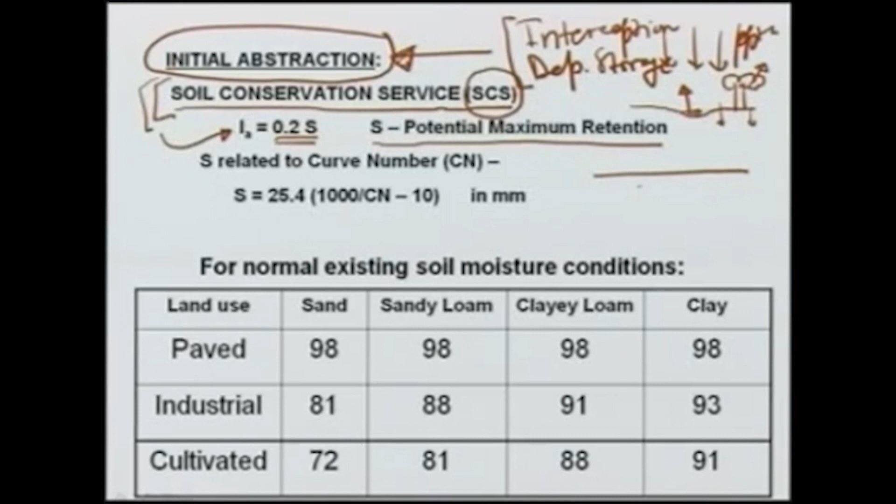Naturally, if we have a surface which is, let's say, paved, then there would be very small retention on the surface. But if we have agricultural land, then there will be a lot of retention possible. Therefore, S will depend on the land use and also what kind of soil it is.

The SCS has related S with an empirical constant called the curve number, or Cn, and typically this Cn is popularly known as the SCS curve number. The curve number depends on the type of soil and the land use of that area. It also depends on the existing moisture condition. For example, if the soil is already moist, then less infiltration will occur. If the soil is initially dry, then more infiltration will occur. So, initial abstraction will be high if the soil is dry initially. So this relation between the curve number...

and the value of S, the potential maximum retention, is given by 25.4 times 1000 over Cn minus 10. This factor converts inches, because originally the formula was in inches, so to convert this into millimeters, we use this 25.4 factor. As you can see, Cn can be a maximum of 100, because when Cn is 100, then S will be 0. 100 means there is no storage, so everything which falls on the surface will go as runoff, there will be no infiltration or evaporation.

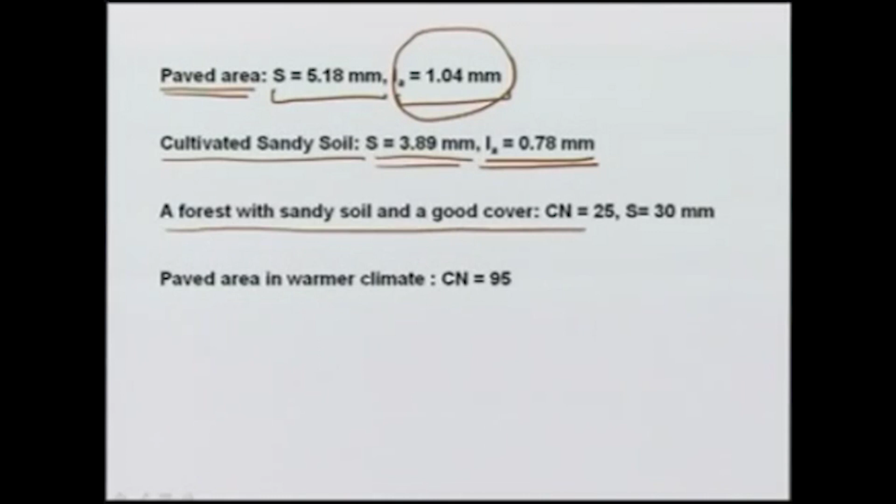Curve number can be as small as 25. For example, if we have a forest area and soil is sandy with good cover, meaning the foliage density is very high, sandy soil will cause more infiltration.

Curve number of 25 will give us initial abstraction, which will be 20% of this, so 6 millimeter, which is quite high, meaning the initial rainfall of 6 millimeter would be completely absorbed by the catchment and there will be no runoff. So, for forest area with permeable, sandy soil with a very good cover, the initial abstraction is quite high.

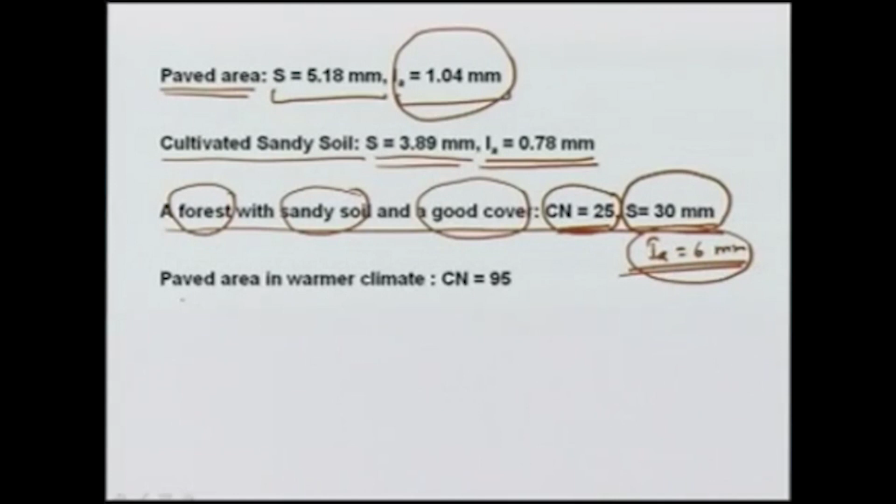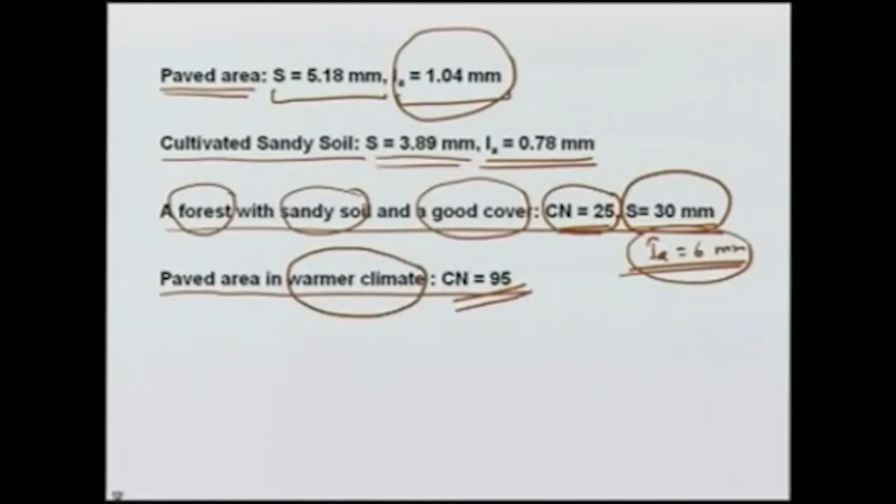It also depends on the climate. For example, if we have a warmer climate, we can reduce the curve number. For a paved area, we have already seen that the curve number is 98 for all types of soils, but if the climate is warmer, we would expect a little more evaporation, and we can reduce the curve number to 95.

So, this method gives us an idea of how to find out initial abstraction from the precipitation. It is an empirical method. Tables of curve numbers are available for different types of land uses, different types of soils, and different existing moisture conditions, what is known as the antecedent moisture conditions.

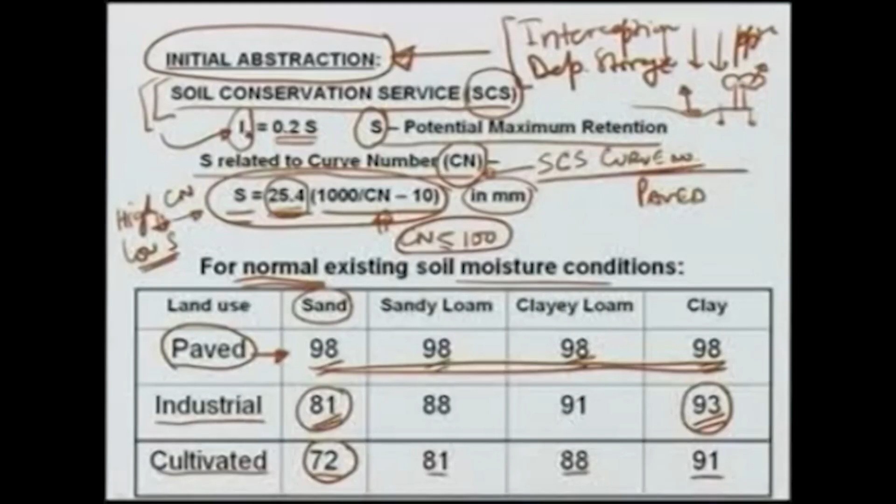Under normal conditions, we have shown the table. This is under normal conditions. If dry or wet, there are other tables or equations which relate the curve number with the land use and type of soil, but we will not go into details of that.

The other part which we have after initial abstraction, then we have other abstractions like evaporation, infiltration, and transpiration. Typically, the evaporation from a water surface can be described as changing with time of the year. For example, in summer months we would expect very high evaporation. For winter it would be lower.

Sometimes evaporation may be as high as 200 or even higher than that. In most of the dry areas in India, it would be higher than 200 to 220 millimeters per month or so. So the question is how to find out this evaporation, which varies over a wide range.

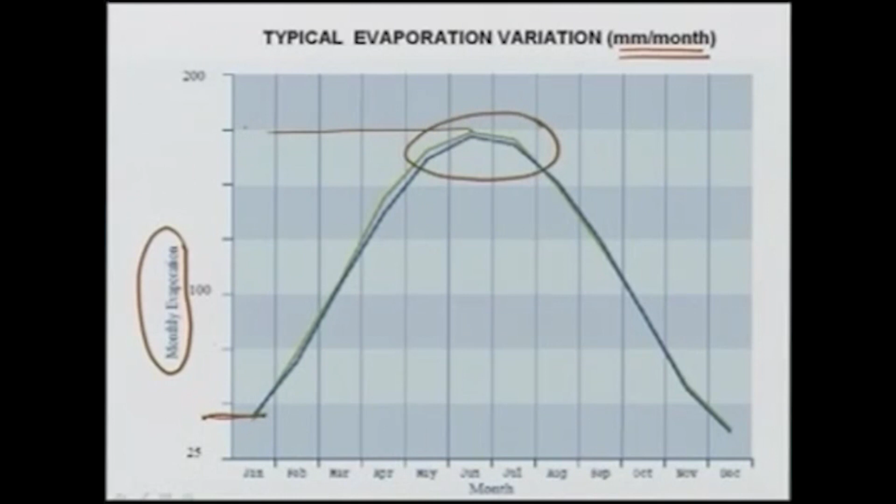If you look at this value, it is close to about 40, 50, and if you look at this value, it is close to 170, 175. So, evaporation will vary a lot from month to month, and for a typical month or for a typical year, if we want to find out evaporation, there are empirical equations which are given.

We have already seen that we can measure the evaporation by using an evaporation pan and then using a pan coefficient. So that measurement can be done, but there are some empirical equations which can be used if data is not available from evaporation pans.

Some of the empirical equations which we have seen, for example, for evaporation, we have the Meyer's equation and the Rohwer's equation. Rohwer's equation and Meyer's equation are both based on the fact that evaporation will be directly proportional to the vapor pressure deficit. So EW, as we have seen, is the saturation vapor pressure, and EA is the actual vapor pressure.

EW minus EA denotes the deficit from the saturation value to the actual value, and this will govern the amount of evaporation from a water surface. We have also seen that not only the deficit...

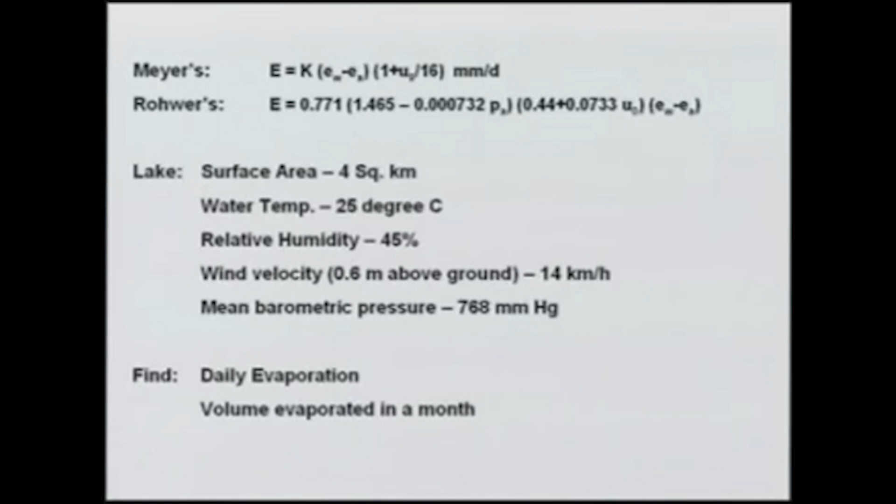This water temperature means we have to find out EW at 25 degrees. We can use the graph or some equations to find out the EW corresponding to this temperature, and as we can see, it is obtained as 23.77 millimeter of mercury, which we can get from the figure or the table. So for a temperature of 25 degrees Celsius, vapor pressure of 23.77 is obtained.

The actual vapor pressure will be obtained by multiplying this saturation vapor pressure with the relative humidity, and the data given for this problem is a relative humidity of 45%. So this indicates that the actual vapor pressure would be 45% of the saturation vapor pressure, which is obtained as 10.70 millimeter of mercury.

In the Meyer's equation, there is an empirical constant K, which depends on the kind of water body we are dealing with. If we have a large and deep body, then K is taken as 0.36. Since this is a large body, 4 kilometer square area, we can take K as 0.36.

So knowing K, EW and EA, we are now left with obtaining the value of U9, which is the velocity at 9 meters above the ground level.

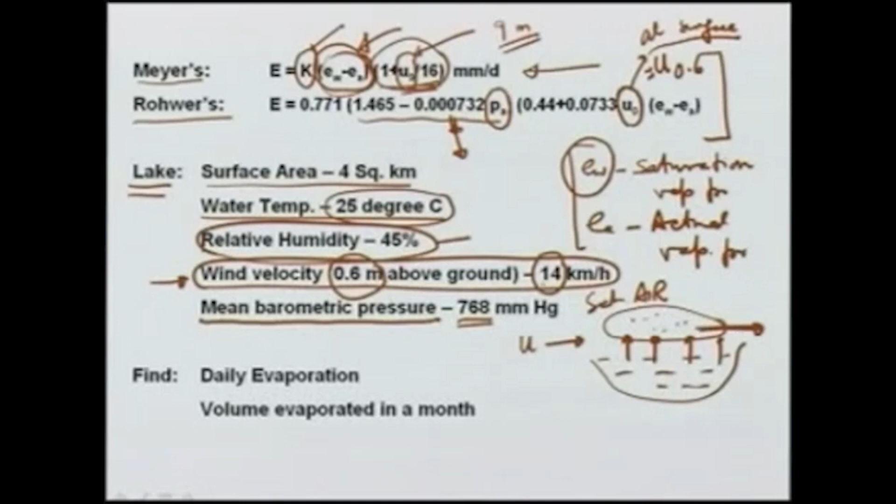So using the Rohwer's equation, we have this constant 0.771, barometric pressure term, wind velocity term, and saturation deficit term, and this u0 we will be using as u0.6. So using this data, we get a value of 13.33 millimeters per day. You can see that here we have 10.77 millimeters per day, and here we have obtained a value which is 13.33 millimeters per day. So they are a little different, not exactly the same thing.

The other thing which we do, this is only evaporation. Now, most of the times we would be interested in combining evaporation and transpiration. So we need to know what is the evaporation from a water body as well as what is transpiration from plants or vegetation in that area, and as we have already discussed, we combine these two and call that evapotranspiration.

Evapotranspiration will depend on a lot of factors. For example, what is the solar radiation available at that point, what is the number of daylight hours, because if we have cloud cover, then naturally evapotranspiration will be smaller. So we need a lot of information. There are again empirical methods which use some equations, and there are some theoretical methods which are a little more based on theory rather than only empirical coefficients. So we would look at some of these techniques and see how to compute evapotranspiration based on some of the empirical and theoretical approaches.

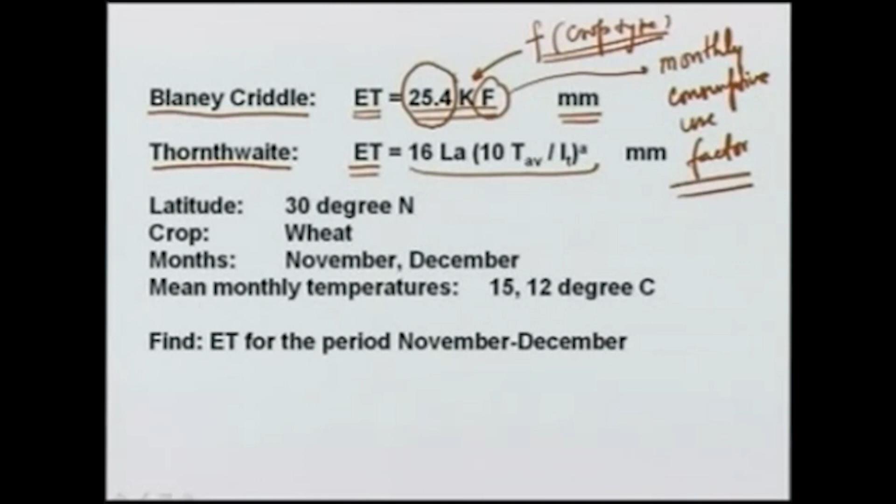And there is another method which is commonly used, is the Thornthwaite equation, which again tells that Et is equal to 16. La is a factor which depends on the latitude and the month. T average is the average temperature, and using these two equations we can find out the evapotranspiration at a particular latitude for a given month where average temperature will be known.

So let us take this data. We have location where the latitude is 30 degrees north, crop is given as wheat, and for wheat we know that the value of k in the Blaney-Criddle equation is taken as 0.65. For rice it is 1.1. Now let us look at 2 months, months of November and December, for which the mean monthly temperatures are 15 for November and 12 for December.

And what we need to find out is evapotranspiration for this period of 2 months, November and December.

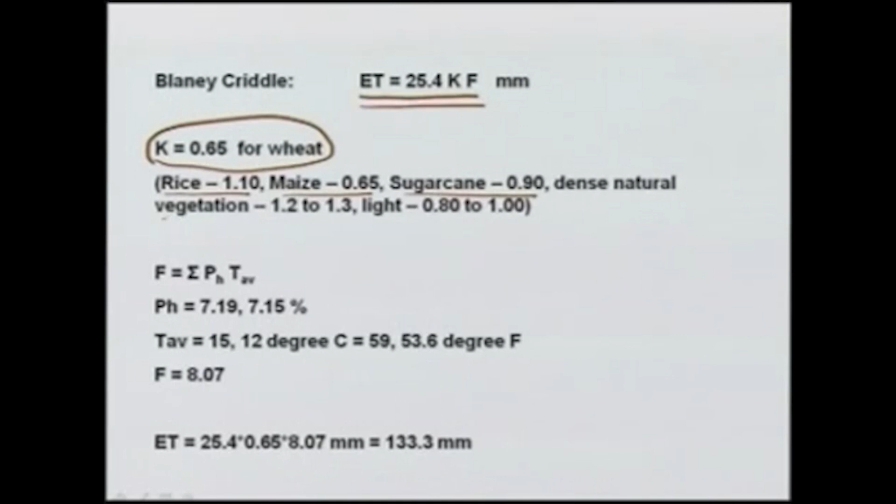In the Blaney-Criddle equation, written as evapotranspiration equals 25.4 kf, we have already discussed that for wheat, k is given as 0.65. There is a table of values of k for different types of crops. For example, rice is 1.1, maize 0.65, sugarcane 0.9. Natural vegetation, if dense, can be taken as 1.2 to 1.3, and if light, 0.8 to 1. Since wheat is given here, we will take k equal to 0.65.

The factor f is the summation of pH. pH is the monthly percent of annual daylight hours, and this will depend on latitude and of course the time of year, which we say as month.

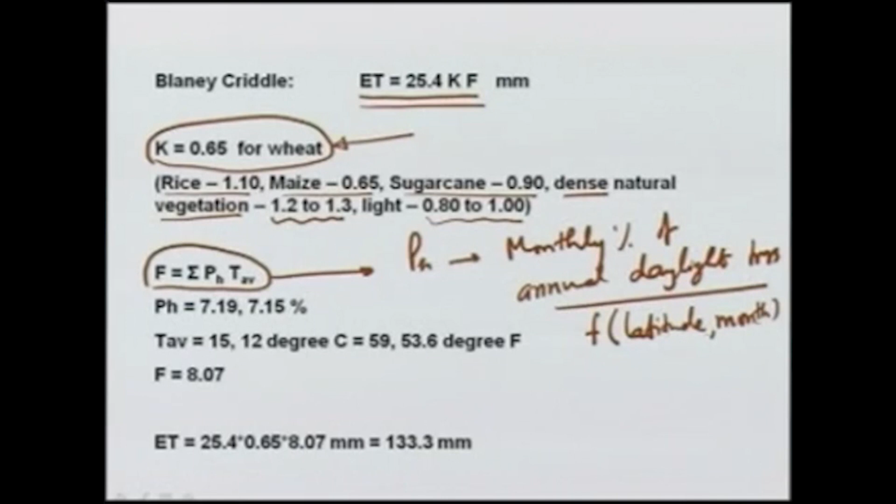T average is given for November and December as 15 and 12 degrees. In the Blaney-Criddle equation, which was based on the FPS system of units, temperature was in degrees Fahrenheit. So we can convert this 15 and 12 degrees Celsius to 59 and 53.6 degrees Fahrenheit.

The pH value is obtained from a table of values which relate the monthly sunshine hour percent with the latitude and the time of the year.

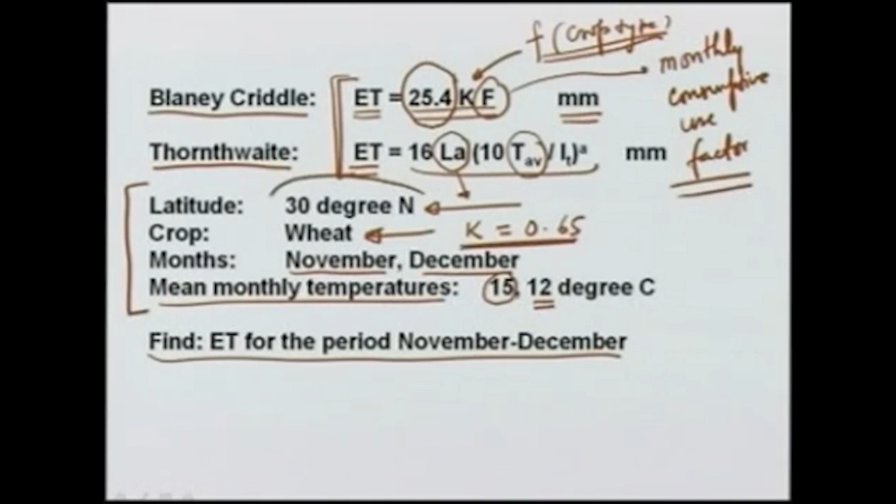For example, the latitude given, if we look at the data for 30 degrees north latitude, for November and December we can look at the percentage values: 7.19% for November and 7.15% for December.

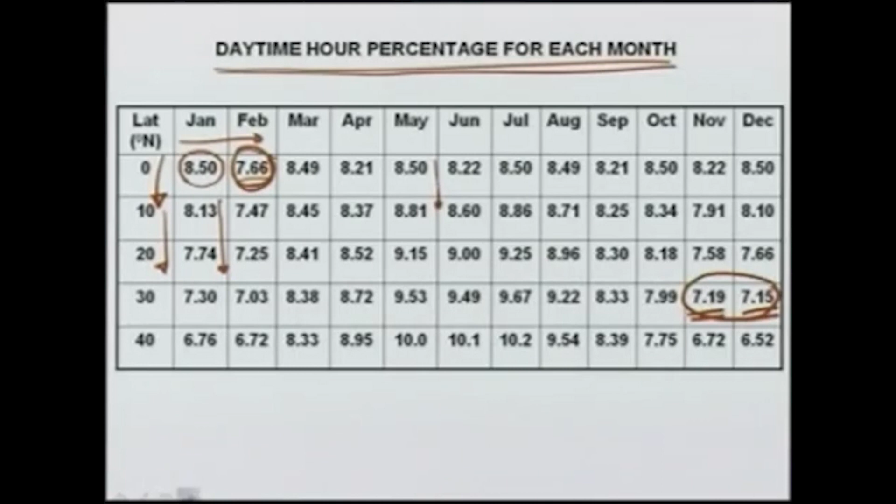So using these two values of percentage and using the mean temperature, we can estimate the value of F, which is the summation of pH monthly percent. We have already seen this as 7.19 and 7.15%. T average is 59 for November, 53.6 for December. So the summation of these two, sigma pH T average for these 2 months, comes out to be 8.07.

So knowing F and K, we can find out the evapotranspiration. 25.4 converts from inch to millimeter, K for wheat, and F for November and December months for 30 degrees north latitude. It gives us 133.3 millimeters of evapotranspiration over the 2 months of November and December.

Similarly, if we use the Thornthwaite equation, we can write Et equal to 16 L A, 10 T average over It, and exponent A. The exponent A, as you can see, is given by another equation which relates it with It. It is the heat index.

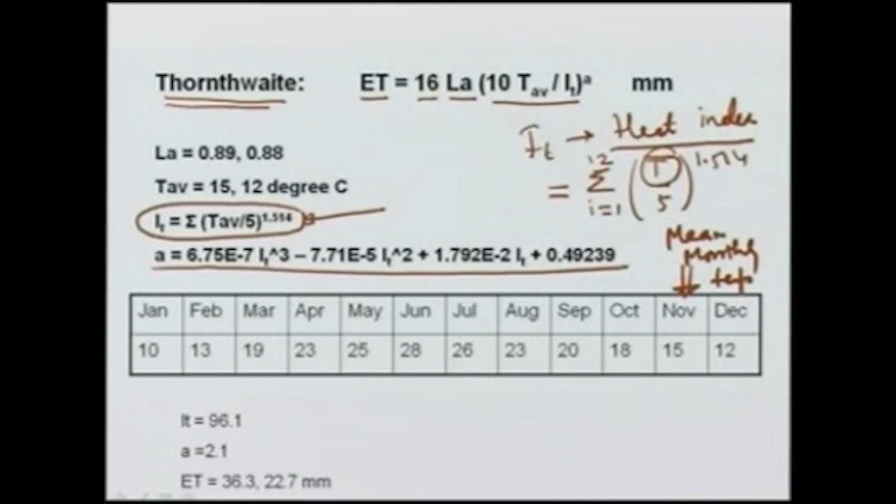The heat index can be obtained if average temperatures are given for each month. So we have this additional data which should be given to us. This is the mean monthly temperature, in degrees Celsius. So in Thornthwaite we are using Celsius. For January, you can see that the mean monthly temperature is 10 degrees centigrade.

November and December were already given to us, but for this method we need the whole year's data available. Using this entire data set we can estimate the value of It, and it turns out to be 96.1. So T average by 5 for each month, to the power 1.514, summing over all the months, this summation goes from i equal to 1 to 12, as written here.

So, for each month we need to add up all these factors, and when we do that we get I t equal to 96.1. A is a function of I t, some constant into I t cube, again I t square, I t and a constant term, which gives us 96.1, 2.1. For I t equal to 96.1, A is given as 2.1.

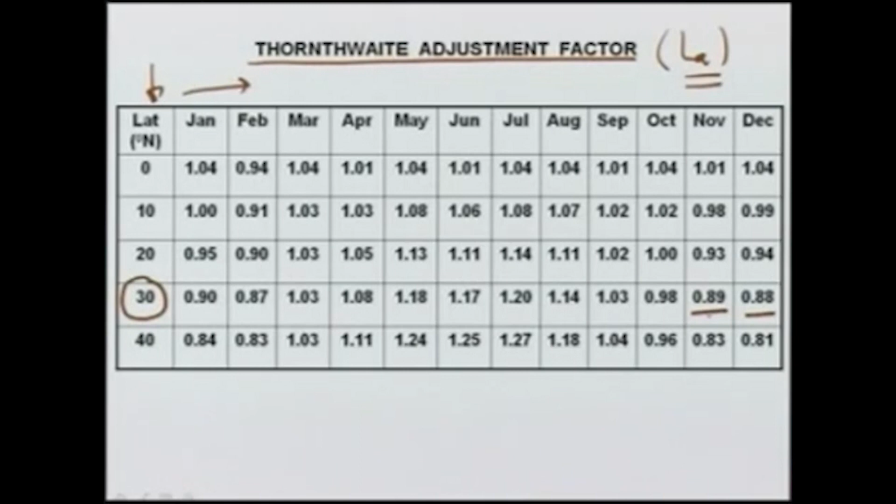The value of L A is the one which is required, different for different latitudes and different months given in a table. This is the adjustment factor L A, and for the given latitude of 30 degrees, for the months of November and December, we can see that the correction factor or adjustment factor is 0.89 and 0.88.

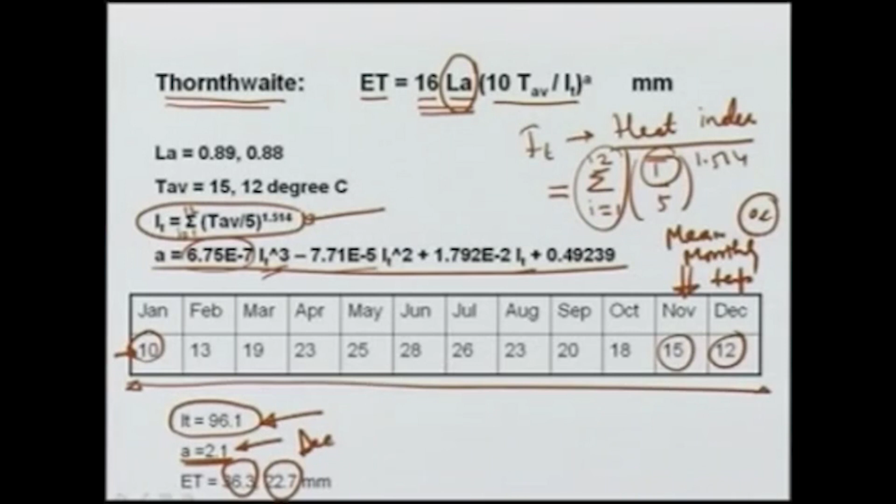These are empirical equations, but there are some theoretical equations also available to find out the evapotranspiration. The most commonly used theoretical equation is the Penman's equation. If we look at the Penman's equation, it is based on the incoming solar radiation at that particular location and for that particular period of the year.

So, we need to have some data about what will be the solar radiation coming at different latitudes at different times of the year. There are some tables which are available for this purpose, and we will look at a few of those tables which are needed in the Penman's equation, similar to other equations, tables which show behavior with different latitudes and different times of the months.

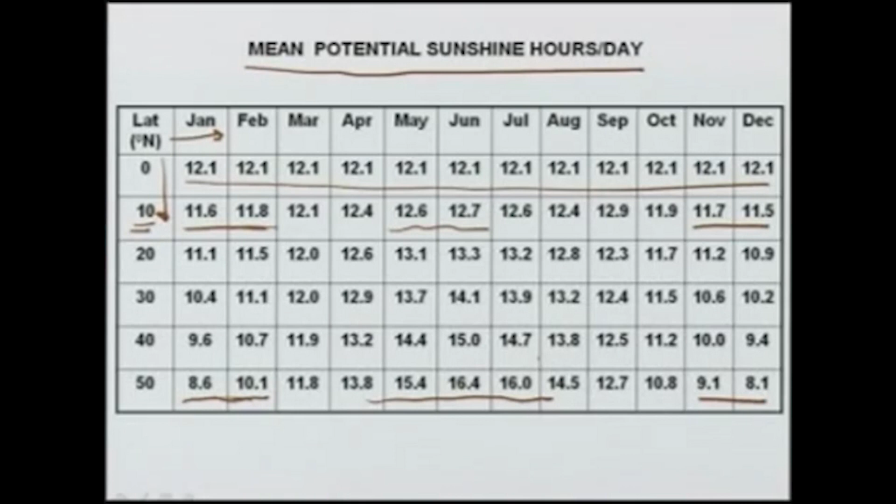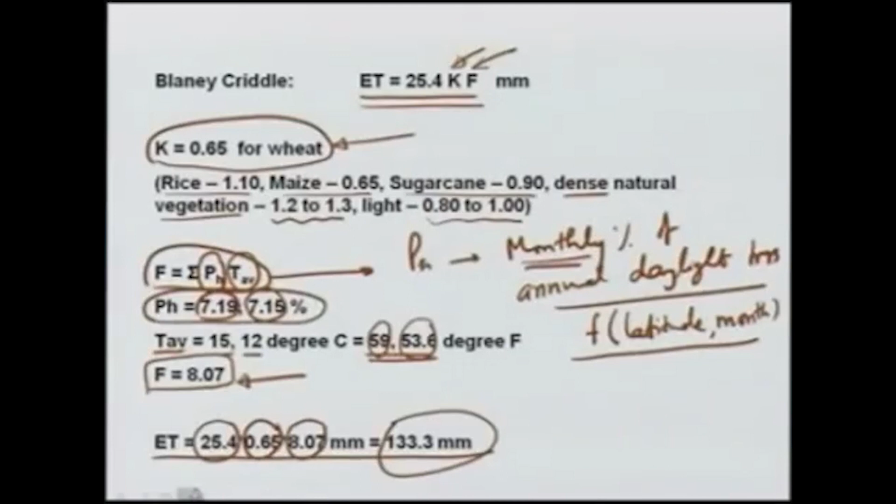So, these two tables, mean potential sunshine hours and mean solar radiation, would be helpful in obtaining estimates of evapotranspiration using the theoretical equations. In the Penman's equation, the equation which is given for finding out the evapotranspiration involves solar radiation.

The equation which is given by Penman is potential evapotranspiration equals some factor A times H n, this is the radiation, again another factor gamma E A, this is the evaporation, weighted by A and gamma, then divided by the total value A plus gamma.

The data which is given in this example is that for the month of November at a latitude of 30 degrees north, mean monthly temperature is given as 15 degrees centigrade. In this case, let us take the mean relative humidity as 75%, and actual mean daily sunshine hours for the month of November are taken as 9.

Potential daily sunshine hours are larger than this, but actual daily sunshine hours are only 9 because sometimes there may be cloud cover. Wind velocity is measured at 2 meters above the surface and was found as 4 kilometers per hour, but in Penman's equation we need velocity in kilometers per day, so we convert it into 96 kilometers per day.

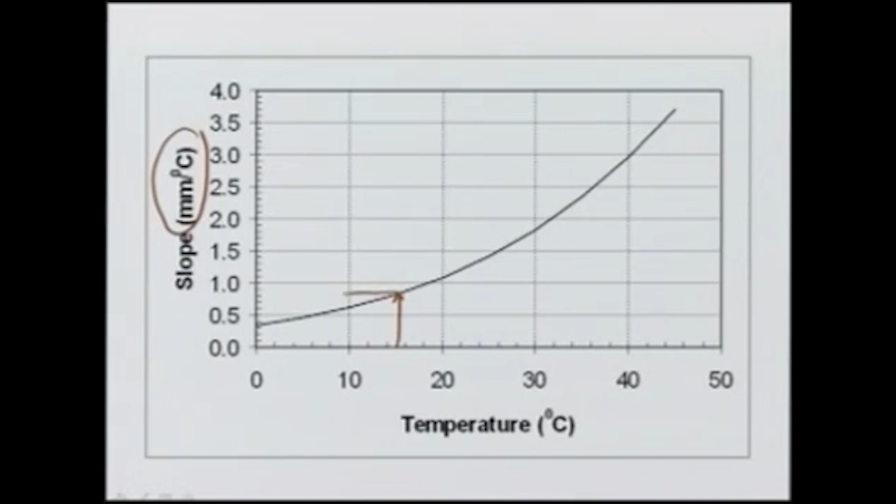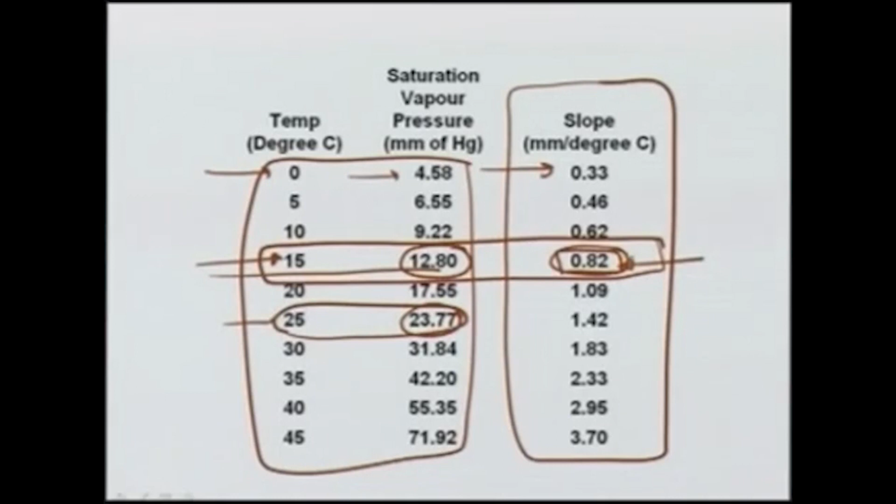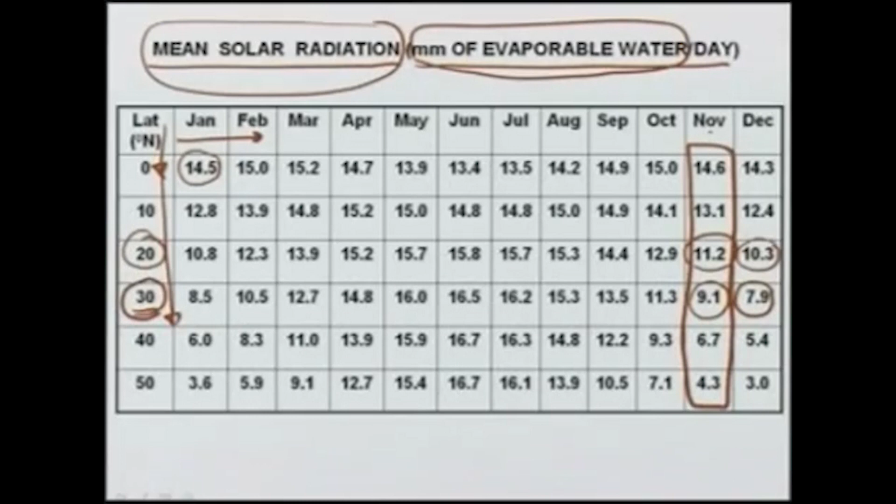The other thing we need is the amount of solar radiation available, and if we look at the month of November for different latitudes, we have these values of mean solar radiation. So using these tables and coefficient values, we can estimate the different parameters in Penman's equation.

So we will look at an example. The month is November, latitude is 30 degrees north. Using this data, we obtain from the table that HA is 9.1 millimeters of evaporable water per day. This is a function of latitude and month, so the table gives us the available radiation as 9.1 millimeters.

EW we have also seen, for a temperature of 15 degrees, was 12.8 millimeters of mercury. The relative humidity given in this case is 75%, so the actual vapor pressure will be 75% of EW, which is obtained as 9.6. So EW and EA can be obtained from the temperature and relative humidity data.

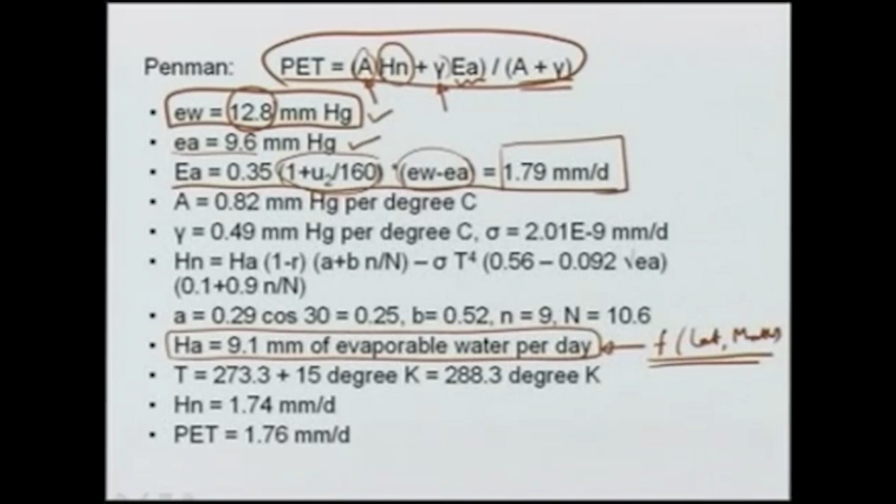The evaporation term for Penman's equation is given by an equation involving a 0.35 coefficient, the wind velocity term, and the saturation deficit term. U2 means the wind velocity at 2 meters. In this case the velocity is given at 2 meters, so we do not need the height correction, and we use 96 kilometers per day as the velocity. So using 1 plus U2 by 160, the wind velocity term, multiplied by the saturation deficit term and 0.35, we get EA as 1.79 millimeters per day.

The slope of the saturation vapor pressure curve, again obtained from a temperature of 15 degrees, was 0.82, so that is the value of A, the slope of the EW versus T curve, in millimeters of mercury per degree Celsius. The value is obtained from the table as 0.82, so A is also obtained. The psychrometric constant gamma is 0.49 millimeters of mercury per degree Celsius; that value is almost a constant.

In Penman's equation, we use the Stefan's constant, and the value taken is 2.01 times 10 to the power minus 9 millimeters per day.

The Stefan-Boltzmann constant is used here, sigma T to the power 4. T is the temperature in degree Kelvin. So, T as we have written here, for a temperature of 15 degrees Celsius, we have to add 273.3 and we get a T of 288.3 degree Kelvin. There are some correction factors here, a plus b n by N and 0.1 plus 0.9 n by N.

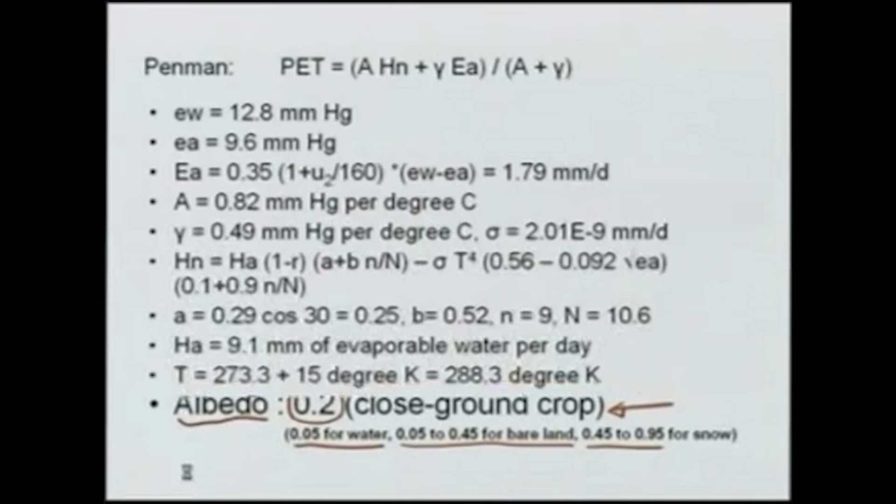These correct for the actual number of sunshine hours compared to the potential sunshine hours. In this case, the potential number of sunshine hours for the month of November at latitude of 30 degrees north can be obtained from the table, and the value which is obtained is 10.6 hours. So, this means that we can have a maximum of 10.6 hours of daylight in that period on that latitude, but the actual number n is only 9.

So, this may happen due to a number of reasons. Some days may be cloudy, so sunshine hours are limited. So, because of this number of actual sunshine hours being less than potential hours, we have these correction factors a plus b n by N here and 0.1 plus 0.9 n by N here, in which a is related to the latitude as 0.29 cosine of the latitude, in this case 30 degrees, and it comes out to be 0.25. b is a constant equal to 0.52.

r is the albedo given as 0.2. HA, available solar radiation that we have seen, will depend on the latitude and the month, and from the table we have seen the value as 9.1. So, in this equation all the terms are known, and therefore, we can find out the net radiation in terms of evaporable water per day as 1.74 millimeter per day.

So, as we can see here, EA and HN both have been obtained. In this case, they are very close. HN is 1.74 and EA is 1.79. So, in this case, the relative magnitude of delta and gamma will not really matter, because these two values are very close. So, whatever weight we assign to individual values will not affect the calculation very much, but still if we use delta and gamma as weights, we get potential evapotranspiration as 1.76 millimeters per day.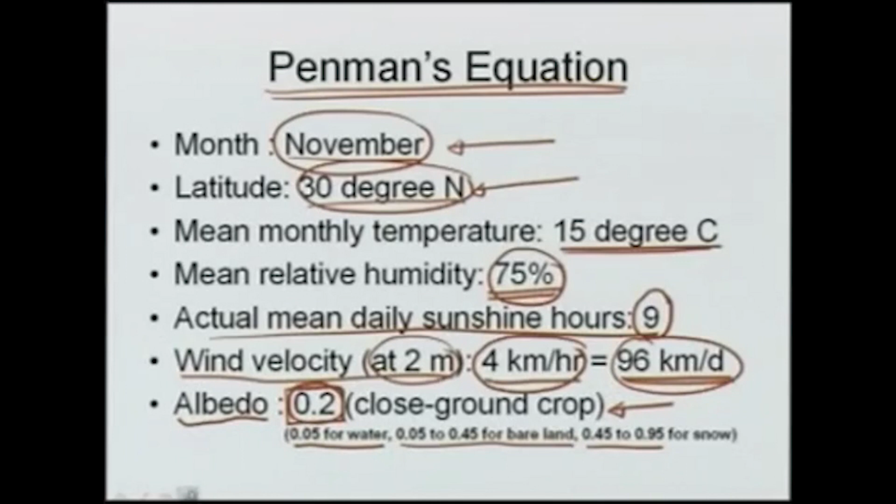So, for the month of November at latitude of 30 degrees north, we can expect, if the actual sunshine hours are 9 per day on an average and relative humidity is 75%, then we can expect for a wind velocity of 4 kilometers per hour and for an albedo of 0.2, that the potential evapotranspiration from that area would be 1.76 millimeters per day. So, using either the theoretical equation, where Penman's is the most common, or some empirical equations, for example, Thornthwaite, we can find out what is the potential evapotranspiration from that area.

So, knowing the initial abstraction and the potential evapotranspiration, the only other abstraction which we need to look at is the infiltration. Infiltration depends on the soil type, and as we have seen, there are some curves which relate the temporal variation of infiltration rate. For example, infiltration rate will be very high at the beginning of the storm, and as we move further in time, infiltration rate will decrease because the soil has become more saturated. The soil may also become compacted because of the impact of the raindrops. So, generally the infiltration rate will decrease with time.

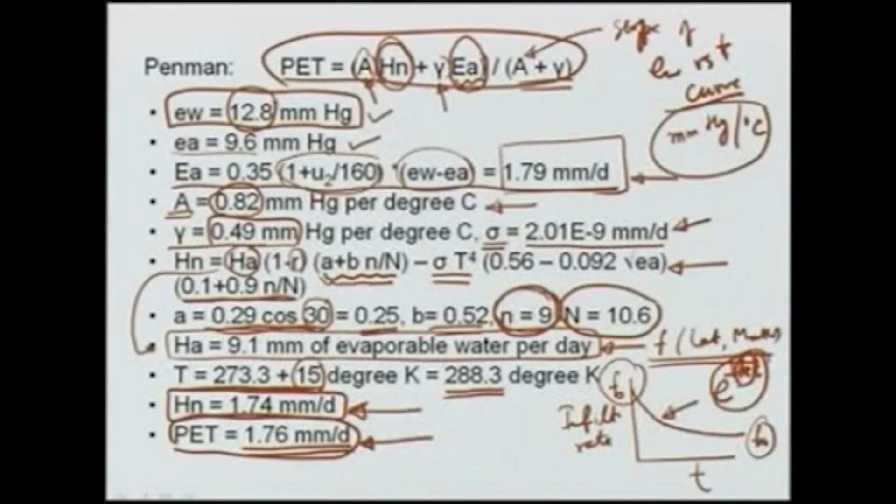So, there will be some rate here at time 0, there will be some rate here at infinity, and then typically an exponential decrease is specified as the change of infiltration with time. But this becomes very complicated to estimate these parameters f0, f infinity, and there is some rate here which typically is like e to power minus kt. So, finding out this k also becomes complicated. So, there are some simple methods which can be used to estimate the infiltration loss.

The infiltration indices in a way represent an average value of the loss. The most commonly used index is the phi index, and what it means is some kind of average loss from the precipitation. So, if we are given a storm hyetograph, for example, a storm may look like this, intensity may be millimeter per hour and time in hours.

So, we may be given that a rain occurs with this intensity and this temporal variation, and we may be given runoff. So, knowing the amount of rain and the amount of runoff, we can estimate what are the losses, and using those losses we can estimate what is the average loss expressed in terms of phi index.

So, let us take an example in which the precipitation of 88 millimeters occurs in 8 hours as shown in this table, that from 0 to 1 hour the intensity is 4 millimeters per hour, similarly 1 to 2 is 8 and 7 to 8 intensity is 5. So, if we add all these up, we get 88 millimeters of precipitation.

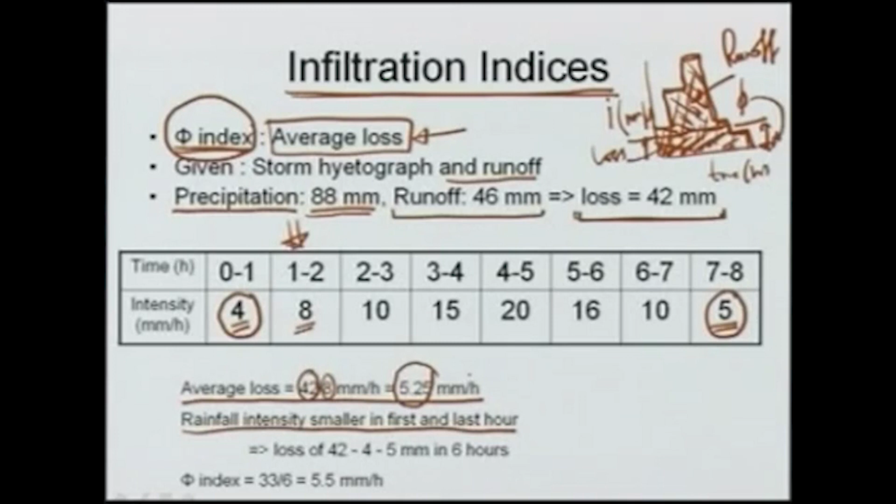But if we look at the table, for the first period and the last period, rainfall intensity is smaller than 5.25 - the first period is only 4, the last period is 5. So in those periods the losses cannot be 5.25, because losses are limited to the amount of rain falling. All of it can be lost, but no more than that.

So we need one more iteration, assuming that in the first hour the loss is 4 millimeters, in the 8th hour the loss is 5 millimeters, and in the other 6 hours we find the loss. We can say the loss is 42 minus 4 minus 5, which is 33 millimeters in 6 hours, giving an average loss of 5.5 millimeters per hour, and all other values are higher than 5.5. Therefore the phi index is 5.5 millimeters per hour.

So in this way we can obtain the value of an average loss over the entire period.

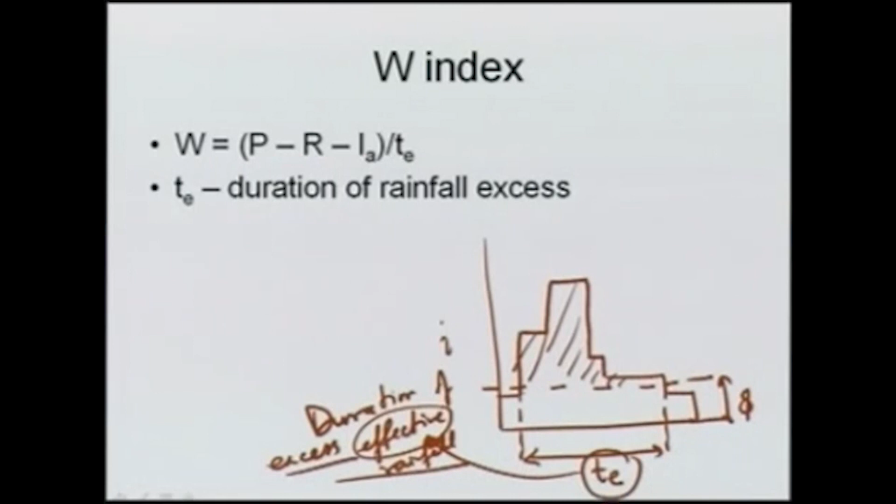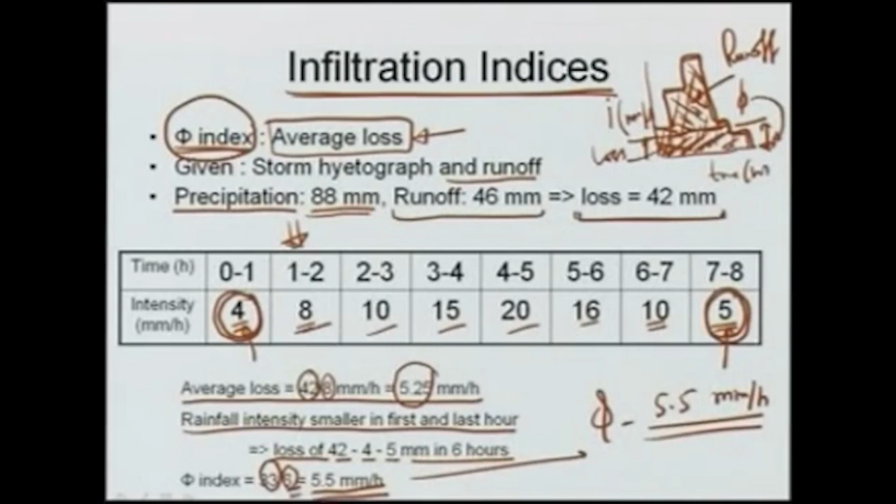We can also look at the hyetograph, and let's say the phi index is somewhere here - then we can define an effective duration, TE, which is the duration of effective rainfall or excess rainfall. This rainfall is what contributes to the runoff, and the rest is lost to infiltration, evaporation and abstraction. So this represents the effective time or time of excess rainfall.

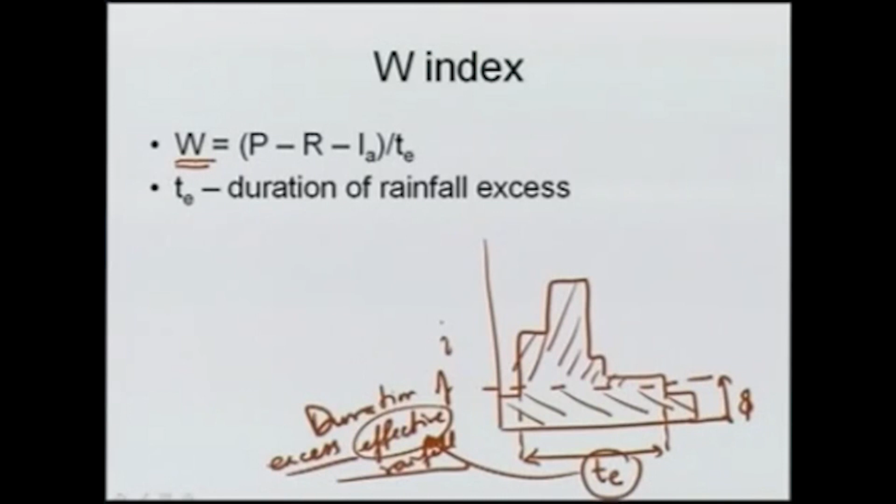So phi index is very commonly used to estimate the average loss. There are some other indices also - for example, the W index, which is given as precipitation minus runoff minus initial abstraction, divided by the duration of rainfall excess. But phi index is a little more common.

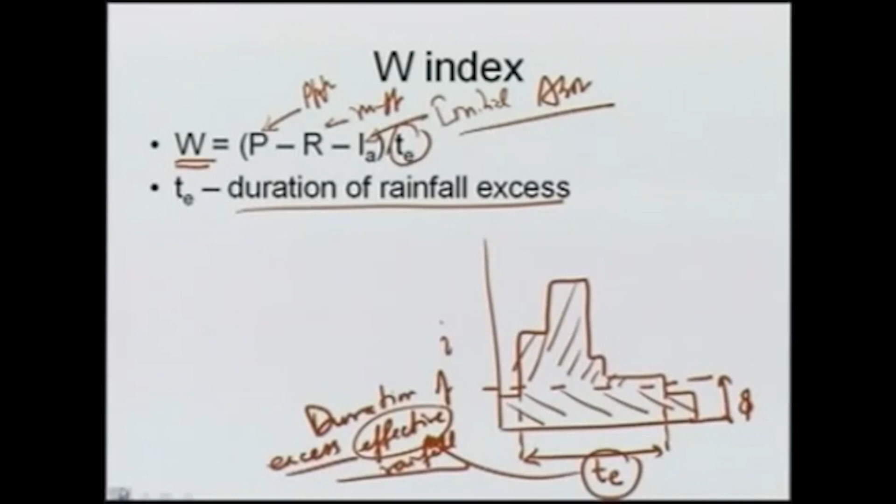There are some other methods also of estimating phi index. After getting the phi index, we can prepare a table showing for different times what the excess rainfall is - that is, after accounting for losses, what additional amount remains. In this case, the 4 is completely lost, and out of the 8, we have a loss of 5.5 millimeters. So for all other values we subtract 5.5, except the first and last which become 0, and the sum of all these turns out to be 46 millimeters.

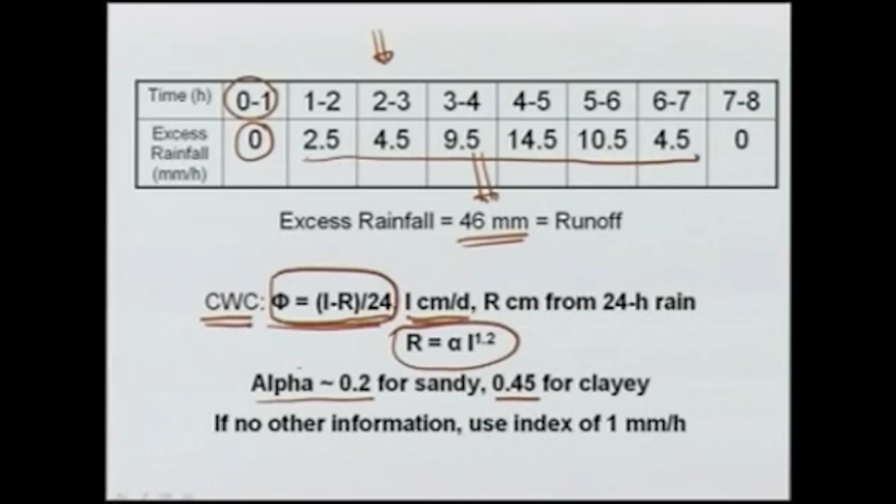Central Water Commission, CWC of India, has given an equation correlating runoff with rainfall. If a rainfall of I centimeters per day occurs in 24 hours, the runoff can be correlated by alpha times I to the power 1.2. Alpha depends on the soil type: 0.2 for sandy, 0.45 for clay, so we have higher runoff for clay soils. Phi index can then be defined as I minus R divided by 24, and can be used to estimate the effective or excess rainfall duration.

So in today's lecture, we have seen various abstractions and how to compute them. We have looked at initial abstraction, evaporation, evapotranspiration and infiltration, and various empirical and theoretical methods to estimate these parameters, which can be used to find out how much percentage of rainfall will be lost and how much will go as runoff, which is our main area of interest - how much runoff occurs due to a particular storm event.